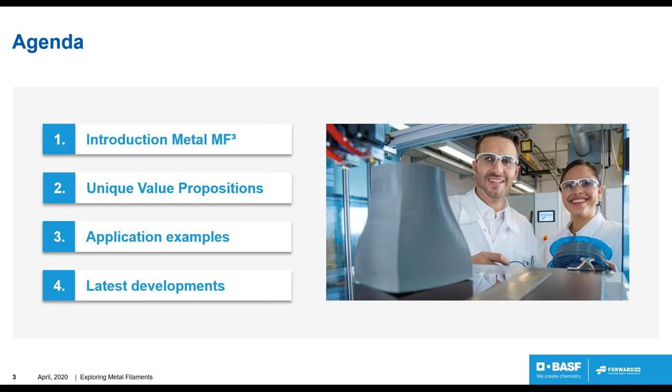I'll go through the agenda real quick. We're going to introduce you to metal fused filament fabrication, or MF3. We're going to go over some of the unique value propositions of the material and the system, and speak about some application examples. Lastly, some developments and upcoming events.

Fundamentally, our metal filaments are a filament used for 3D printing systems, from everything from your almost hobby level or advanced hobby level prosumer up to an industrial printer. Fundamentally, they're metal powder bound together with binders to create a filament. This filament is designed to be usable with both direct drive and Bowden FFF printers.

After a part is printed, we use a system called debinding and sintering, which removes the binders and sinters, producing a full metal part. This technology was fundamentally created for metal injection molding about 30 years ago, so we have a lot of experience developing feedstocks.

Metal injection molding is nearly identical to plastic injection molding, but in that case, again like our material, metal powders are combined with binders to be able to form your part, followed by removal of the binders and sintering down to a full metal part.

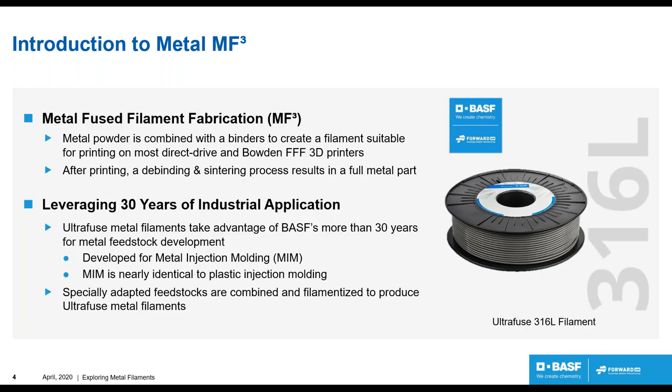We've specially adapted our feedstock for filamentation. There's a lot of work to make sure that this material works in as many printers as possible - feeding systems, extrusion systems, like we said, direct or Bowden. A lot of work went in there to make it user-friendly for as many platforms as possible.

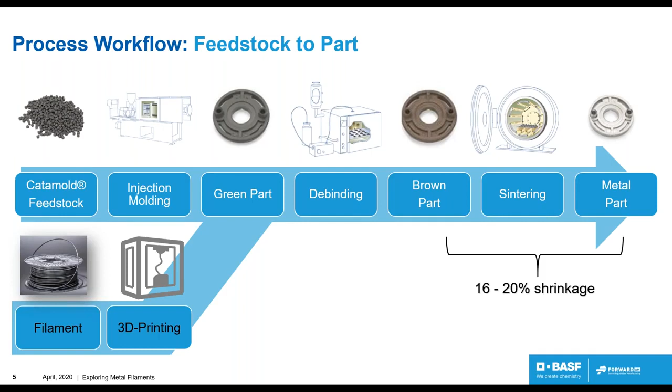Once your green part is created or printed, it's sent in for debinding. Debinding is a catalytic process that removes the organic compounds, leaving mostly metal. The result of this debinding would be your brown part. Your brown part is kind of spongy - think of a metal sponge, where all the gaps that were filled before with binder are now held together with some backbone polymers, but that provides stability for the sintering process. Sintering is just conglomeration of material into a solid part through heat and pressure, and at the end, you have a final metal part that's fully metal.

So what are some of the unique value propositions? We like to consider this material - it was developed to be a disruptor and a force multiplier. It's a disruptor because it has a low relative printer cost - it's an order of magnitude cheaper to buy a printer that can use this material compared to a laser or powder bed based system. It can also provide hollow structures that cannot be made with any other technology.

Also, we have a multi-material printing ability. Many printers, as you might know, have dual extrusion or even filament changing systems or tool head changers. This provides a situation where we could use bimetallics or multiple materials in making our part. I like to say, like a samurai sword, you want the backbone of the sword to be ductile and resistant to shock, but the outside needs to be hard and able to hold an edge and be very, very cutting edge. This is a situation where we could produce a material, a device, or an application like that by taking advantage of the different material properties all in one combined situation or application, which cannot be produced otherwise.

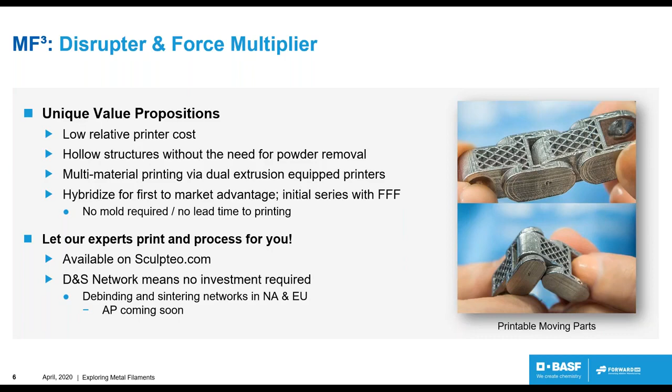So at a price point of around 6,000 euros, you're up and running printing metal. We use the 0.6 nozzle so we could go a little bit faster. The final parts go between 150 and 250 grams, depending on that infill structure and the operational needs of the part. The Sculpteo estimated price would be around 40 euros.

So they're using this for jigs and fixturing also. They can minimize the amount of material they're using and maximize performance and appearance.

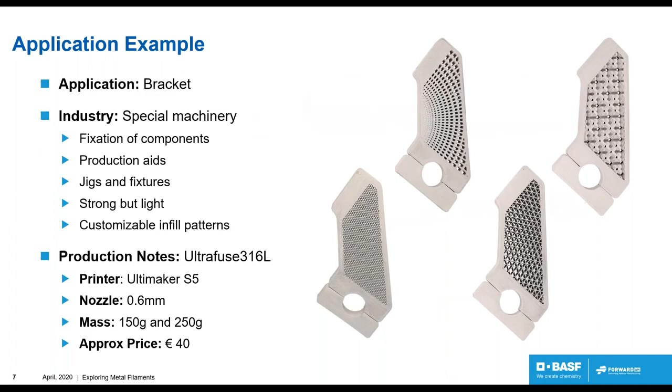In our case, we were able to reduce that by not needing it. You don't need to throw away the material because you're not subtracting it away, you're only adding it. At the same time, the actual component itself weighs 50% less. We were able to do enough design changes that even the part itself is reduced by 50%.

Now this provides, as we said, flexibility and design adaptation. This is something they can do in-house. They can make a couple of different prototypes, test them, look at them, and then send them in for debinding and sintering. In fact, they can make 5 different types, sinter them, bring them back, and then see which one they like the best. It kind of uses a free-form way to integrate the aid in production, while letting the designers and material scientists explore different applications.

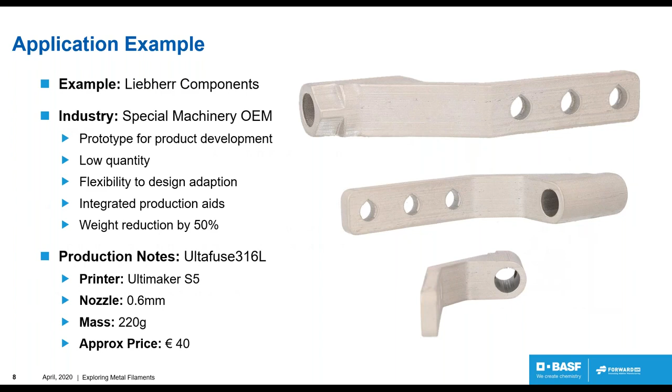Okay, and now our newest material is going to be 17-4 PH. It's a precipitation hardened steel. It's highly heat treatable for levels of strength and hardness, and it's corrosion resistant. So it's widely applied in aerospace, chemical, and industrial applications.

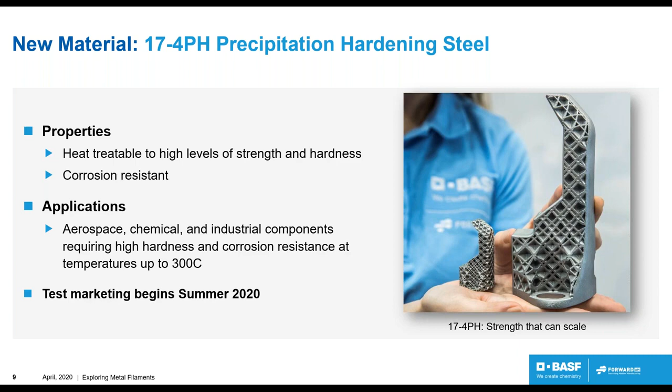Now it's most fitting for high wear applications at temperature. It will hold its mechanical properties, creep resistance, and things like that up to 300 C. This is going to be in a test marketing phase, and it's going to begin this summer.

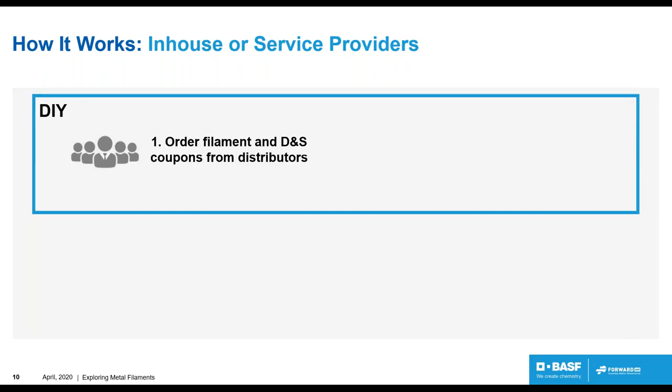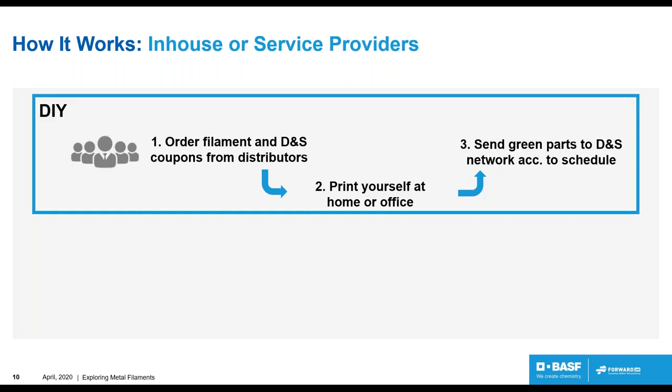Okay, first I want to talk again about how the two systems work. You can buy the filament from one of our distributors. You get a coupon for debinding and sintering. Once you've printed it yourself, you can send it off to our network and schedule for debinding and sintering. They sinter the part and it returns back to you.

Our other option, of course, is Sculpteo, which is currently in a beta program and is even faster. You upload a file, and everything's taken care of for you. With a 14 to 15-day turnaround, parts are sitting at your home or at your desk, and you can start using our material.

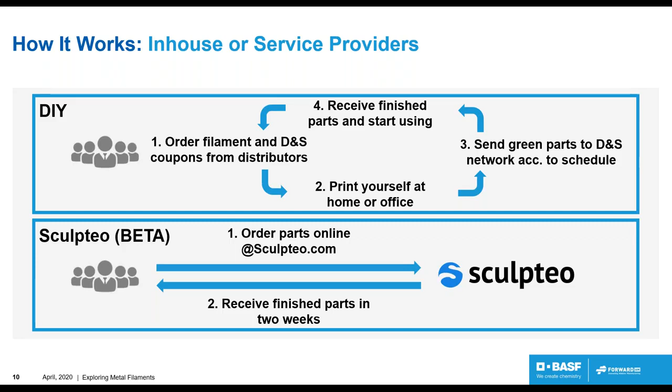And this provides kind of a try before you buy. If you want to just see what's possible, what ideas you might have, without expending too much resources and time printing, or if you're new to printing and want to see how it works once you learn how to print, which again is very easy, you can go ahead and use our platform.

In addition, for designs and setting up the process, there's full documentation on design guidelines, process guidelines, and other examples to help you learn.

One example is post-processing. Here you see what it looks like before polishing. That's what it looks like out of the oven, and then a simple polishing process, just to give users and designers an idea of what to expect and how to best use this material.

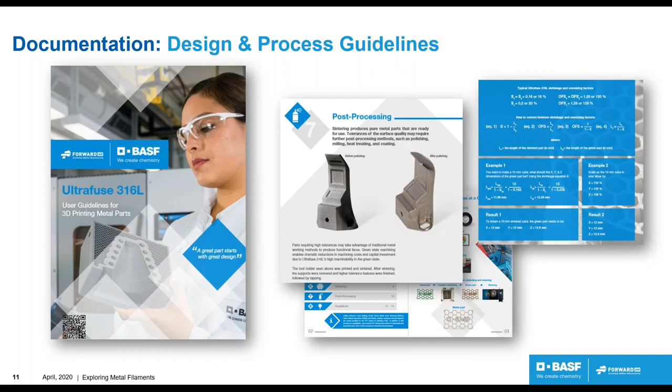Okay, so in conclusion, we want to say that in the office or at home, manufacturing industrial parts is now possible. We are now able to make highly complex parts at orders of magnitude cheaper capital investment for printing, making things that CNC milling, laser sintering, binder jet, laser cutting, and other options could not even make. And if there were an equal design that both could make, ours requires significantly less capital and resource.

Another thing is there's no significant investment required. Not only is the printer much cheaper, the processing network is external, so those steps can be done without you having to buy all that system and all the heat treating equipment and those things. They can be sent to a service and it comes back. Similarly, if you want to do it even easier, benchmark or small series part production can be done with our Sculpteo platform.

Just to wrap it up here, some of the pros and cons. Well, we have freedom of design according to debinding and sintering requirements. Like any other technology, this filament and the parts we make with it have certain requirements to help best optimize the part and its features for your application.

With external post-processing and long lead times, you can also do it all in-house if you want it to be completely controlled, or you can do it a la carte. You can just print it, or use Sculpteo, or use our debinding and sintering network, or we can get you in contact with a service provider. There are many different ways you can do this.

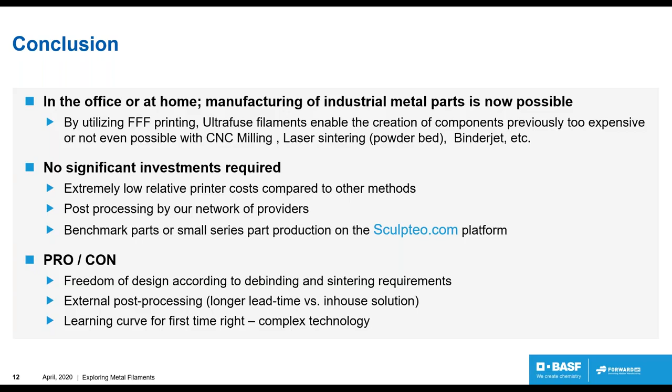Now, like anything, there's a learning curve the first time, since it is a complex technology. That being said, we've tried to make it as easy as possible to use, first of all by using FFF, second by having external processes, and of course by providing design and process guides.